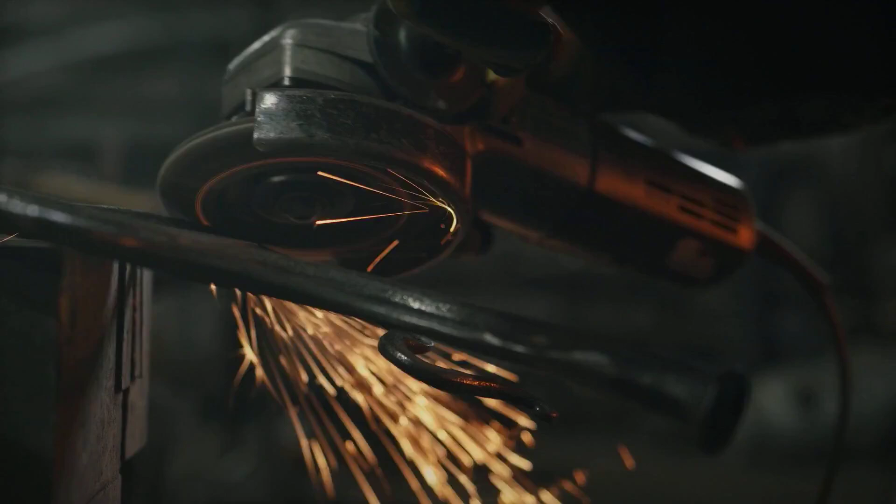In the original design, the suspension of the walkways was an unusual but elegant solution. A single continuous threaded steel rod would hang from the atrium ceiling, pass through the 4th floor walkway, and continue down to the 2nd floor walkway directly below it. At each walkway, a nut threaded onto the rod sat against a steel washer, which sat against a horizontal box beam. The weight of each walkway hung from those nuts.

Critically, and this is the entire engineering story of the disaster, in the original design, the 4th floor walkway hung from one set of nuts, and the 2nd floor walkway hung from a second set of nuts further down on the same continuous rod. That meant each connection only carried the weight of one walkway.

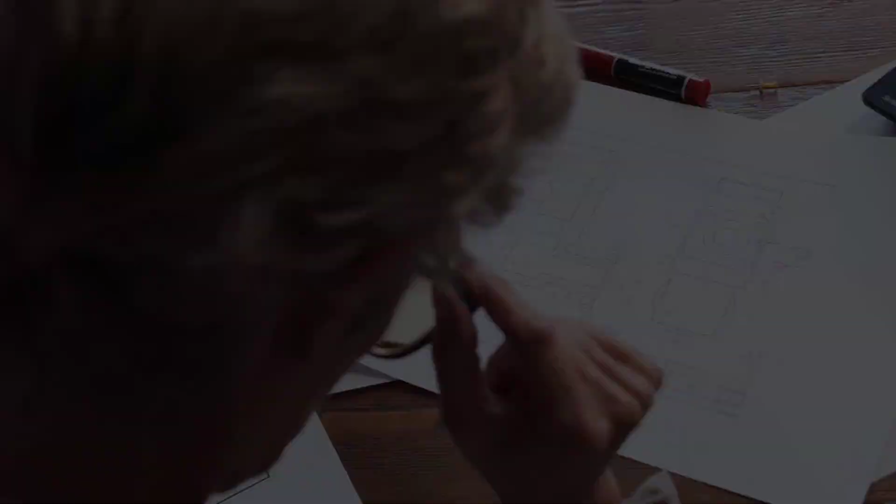The factor of safety was already marginal. The National Bureau of Standards later calculated it at 1.65. The American Institute of Steel Construction code required a factor of safety of 2. The original design was already in violation of code, but the failure was not the original design.

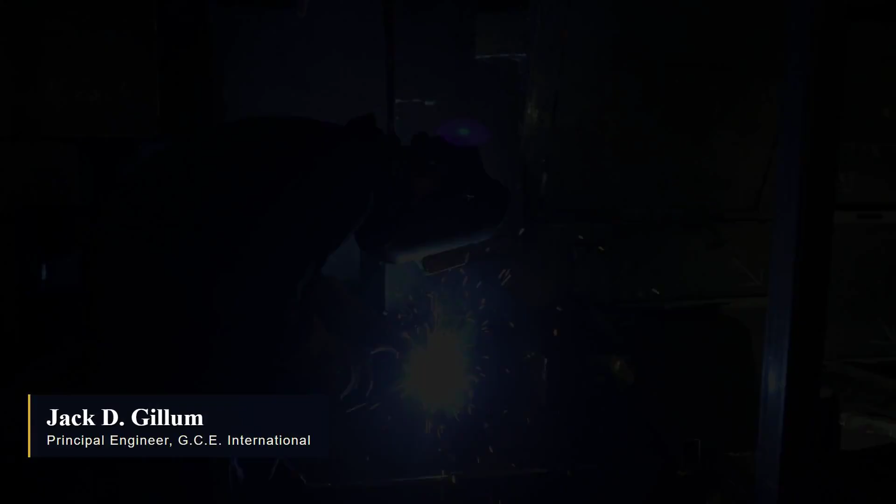In the summer of 1979, Havens Steel raised a practical objection. To install a single continuous rod, a worker would need to thread the entire box beam onto the rod, sliding it along 16 feet of threaded steel. This is extraordinarily difficult on a construction site. The threads would also be vulnerable to damage during installation.

Havens proposed a change. Instead of a single continuous rod, they would use 2 separate rods. The upper rod would run from the ceiling to the 4th floor walkway, terminating in a nut underneath the 4th floor box beam. A second, separate rod would hang from the 4th floor walkway down to the 2nd floor walkway. It is the kind of change that gets proposed on construction sites every single day. Practical, reasonable, cheaper to install. But it had a consequence that no one on the phone call appears to have thought through.

In the modified design, the connection at the 4th floor walkway now had to hold 2 walkways instead of 1. The weight of the 2nd floor walkway, plus everything on it, now hung from the 4th floor connection, as well as the weight of the 4th floor walkway itself. The load on that single connection doubled.

The change was approved by telephone. By whom exactly became the central question of the trial that followed. Havens Steel said they spoke to Daniel Duncan. Duncan and Gillum both denied recalling the conversation. The Havens shop drawings showing the modification were stamped, approved, by GCE International. The stamp was found in the project files.

No one recalculated the load on the connection. No one ran a single piece of arithmetic before, during, or after the change. The factor of safety, which had been a non-code compliant 1.65 in the original design, dropped to approximately 0.6 in the modified design. That is to say, the connection was designed to fail at the load it would be asked to carry. It carried that load for 13 months. Then it didn't. A warning came. Almost no one heard it.

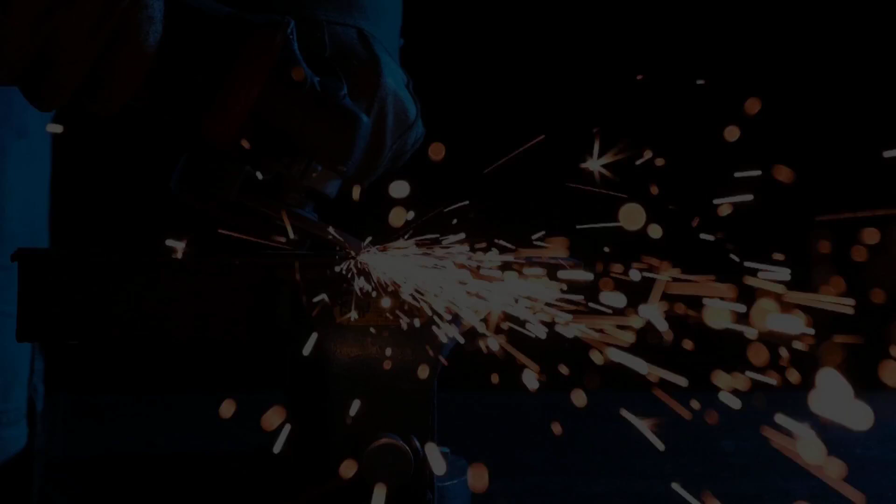During construction in October 1979, a worker felt the walkways move and reported it. A GCE engineer was sent. The verdict: the swaying was normal, within design. No action required. An industrial engineer who attended the hotel's grand opening would later testify that he had walked across the fourth-floor walkway and felt it deflect noticeably under his weight. He thought it felt unsafe. He did not report it. These are the warnings that are easy to see in hindsight.

In real time, they are background noise. The system is working until it isn't. The tea dance had begun at 6 p.m. By 7, the band had been playing for an hour. The dance floor was packed.

40 to 50 people stood on the fourth-floor walkway. Another 40 to 50 stood on the second-floor walkway, directly below it. The total dead load on each walkway was approximately 64,000 pounds. The live load of the people added another 20,000. The connection at the fourth-floor walkway, designed to fail at less than that combined load, finally yielded.

The failure occurred on the east end of the fourth-floor walkway. The rod pulled through the box beam, ripping the steel like cardboard. The east end dropped first. The west end held briefly, swinging the walkway downward like a pendulum until the west end also tore free.

64,000 pounds of steel and concrete fell 40 feet and impacted the second-floor walkway directly below it. The combined weight then continued downward and impacted the people on the dance floor. Witnesses described the sound as a clap of thunder, followed by a sustained roar that lasted 4 or 5 seconds, followed by complete silence, then screaming.

The sprinklers did not activate. The structure that activated them had been destroyed. A water main was severed in the collapse. Within 20 minutes, the atrium floor was under 4 to 6 inches of standing water, in which the survivors and the dead lay together. The full rescue took 14 hours.

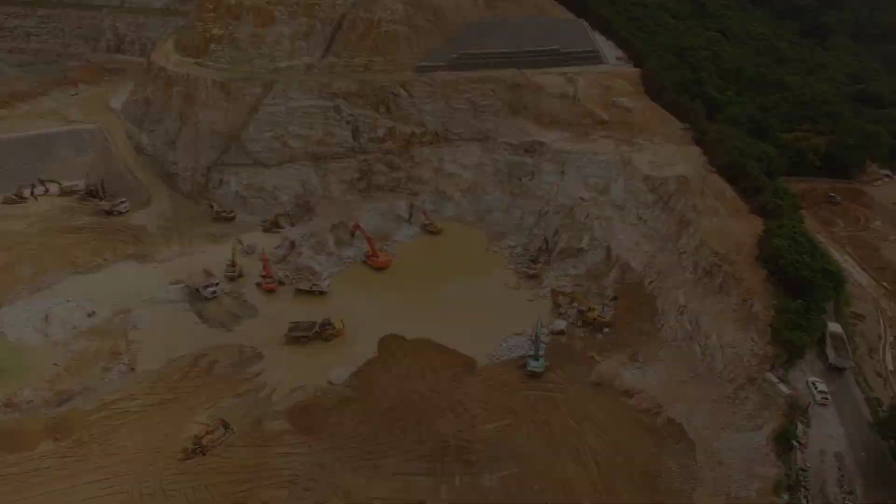By the time fire crews reached the bottom of the pile, the lowest trapped victims had developed crush syndrome, in which the release of pressure causes the muscles to release toxins that stop the heart. Several survivors of the initial impact died during the rescue, in the act of being freed.

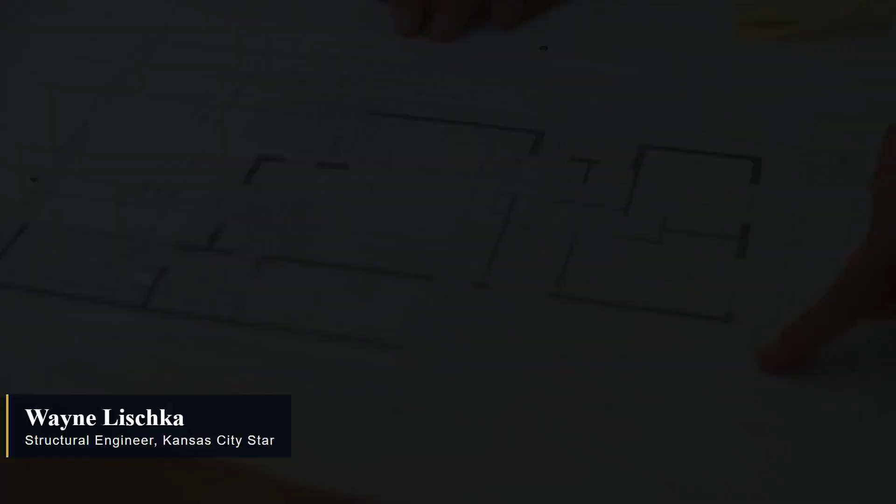In the weeks that followed, the Kansas City Star paid a local structural engineer, Wayne Lischka, out of pocket to analyze the connection details. Lischka spent 3 nights running the numbers. He came back with a single sentence: the connection that failed could never have supported the load it was carrying. The Star published the analysis on November 22, 1981. 3 days later, the National Bureau of Standards confirmed it.

The original design had a factor of safety of 1.65. The modified design, the one that had been built, had a factor of safety of 0.6. The Kansas City Star won the Pulitzer Prize for the investigation.

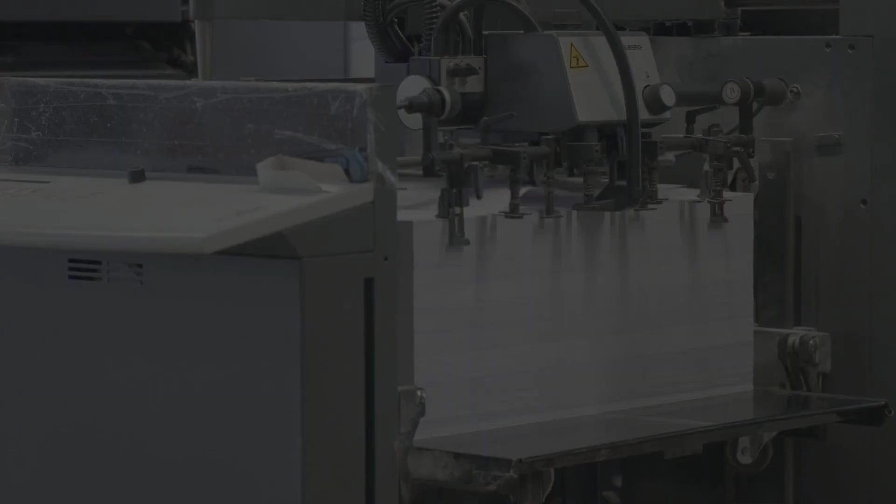In 1986, the Missouri Board for Architects and Professional Engineers revoked the licenses of both Jack D. Gillum and Daniel M. Duncan. The board found them guilty of gross negligence, that they had sealed shop drawings without performing the calculations that the seal certified they had performed. Gillum never practiced structural engineering again.

He spent the rest of his career, until his death in 2012, lecturing at universities, speaking openly to engineering students about what had happened. He repeated the same sentence in dozens of interviews. "I sealed drawings I did not check. There is no other defense."

The civil lawsuits cost the developer and its insurers approximately $140 million. No criminal charges were ever filed. Killing 114 people through professional negligence is not in Missouri a crime. It is a licensing violation. The Hyatt Regency collapse changed the structural engineering profession more than any other event in 20th century American construction.

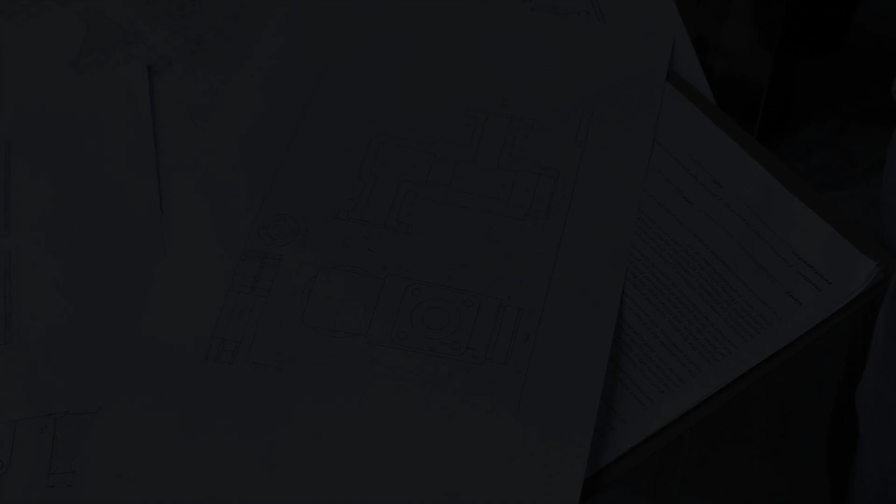The American Society of Civil Engineers introduced a mandatory ethics module to its certification curriculum within 18 months. The opening line of the ASCE Code of Ethics, "Engineers shall hold paramount the safety, health, and welfare of the public," was rewritten in 1983 to encode the responsibilities the Hyatt engineers had failed.

Today, every accredited civil engineering program in America teaches the Hyatt collapse. It is the case study that every American structural engineer carries forward for the rest of their working life. The lesson is not do the maths. Every engineer knows to do the maths. The lesson is check the change.

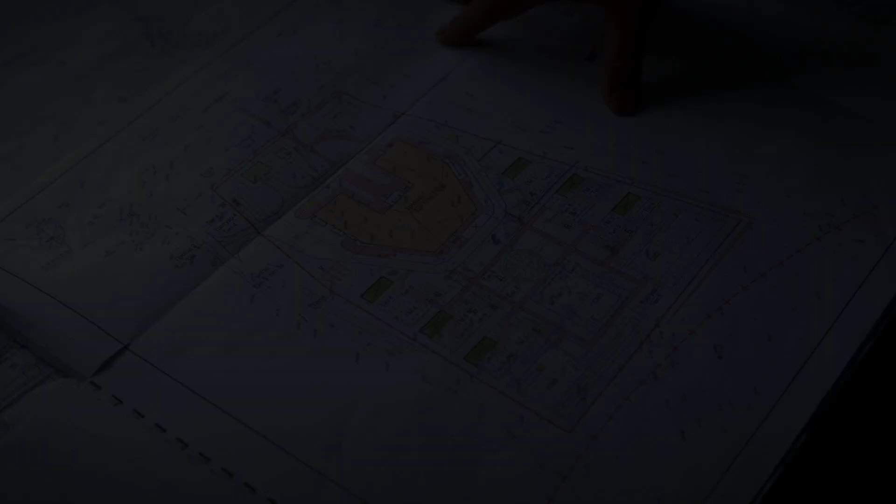When a fabricator proposes a modification to your design on the phone because it is cheaper or easier to build, you do not stamp the drawing without running the numbers again. You do not say it is probably fine. You do not assume the change is small. You do the calculation again from the start every time.

Because the connection that holds the skywalk above the dance floor will hold for as long as it can. It will hold for 13 months. It will hold on Tuesday and Wednesday and Thursday. And on Friday at 7:05 p.m., the connection that did not hold will not give the slightest warning before it fails.

The Hyatt Regency Kansas City is still open, under a different brand. The atrium is still there. The skywalks were never replaced. If you stand on the ground floor today, in the spot where the dancers were dancing on July 17, 1981, and look up, there is open air.

There is a small bronze memorial plaque in the lobby. It lists the names of the 114 victims. There is no plaque mentioning the engineering, no plaque mentioning the phone call, or the calculation that was never performed.

The lesson lives somewhere else, in every structural engineering classroom in America, in the muscle memory of every engineer asked to approve a change, in the field on a Tuesday afternoon, with no time to recalculate. The lesson is to do the calculation anyway.